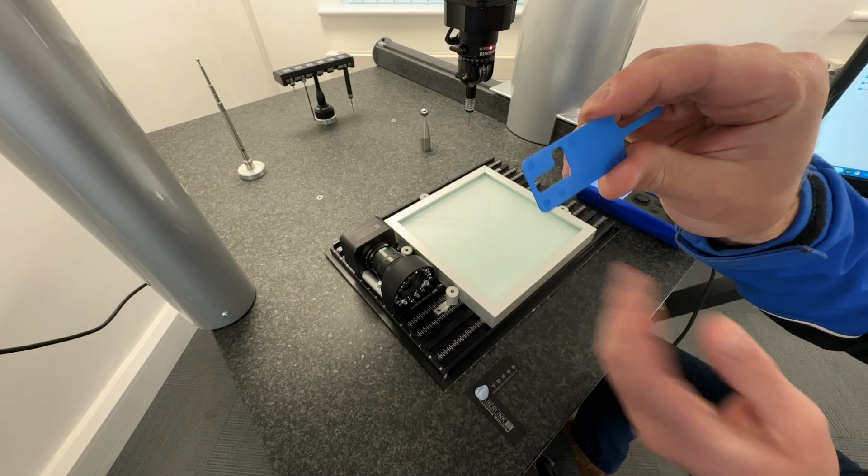In this example we'll be measuring this encoder spacer. It's only 0.8 millimeters thick and it's soft plastic, flexible, very difficult to measure with the touch probe. It also has some very small radius, so it's a perfect example of when you would use the camera.

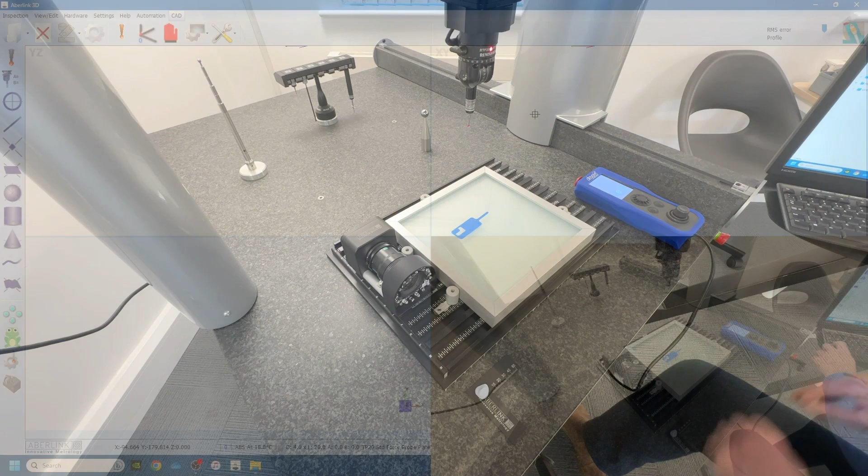So let's dive in, this will be example number 1. Firstly, let's switch over to the camera. Probe options, camera, manually change. We will remove the probe head, connect the camera, set the probe head somewhere safe, and then OK.

The camera now switches on and we should be able to see the software there.

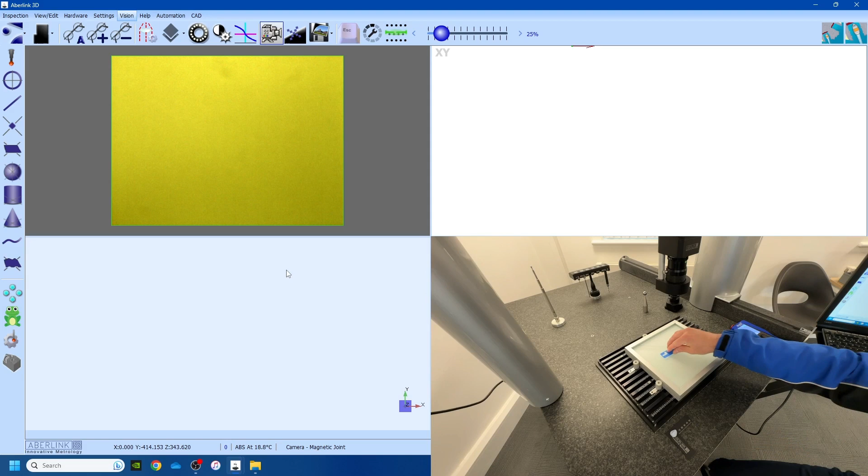The first thing we want to do is try and fixture up the part. If we want this to be a repeatable program, we need to be able to set this in the same place each time. So we fix that somehow by using the fixture plate and keeping the reflective plate located in a set position via these 4 spigots. So now all we need is a way to locate this via a fixture and then remove the fixture so we can scan the edge.

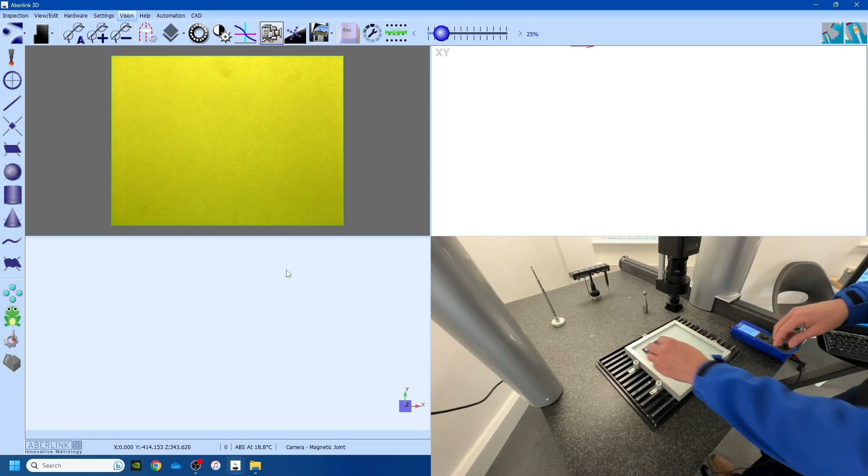Very simple design, this is just one of the Aberlink fixture plates, and if we set this in the corner, we can locate the part into that corner and then remove it. That will keep that in the same place every time.

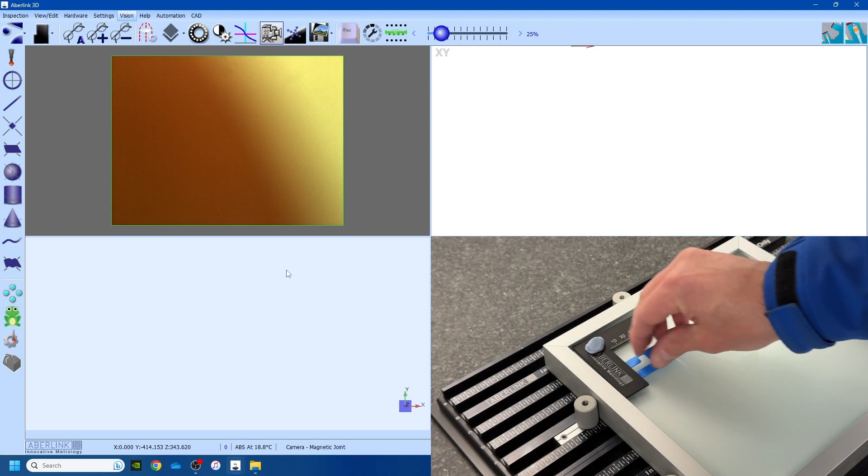So just to show you that once more, if the part is floating free, set something in the corner that we can repeat. We slide the part into that corner and then we lift that out of the way. That will repeat every time.

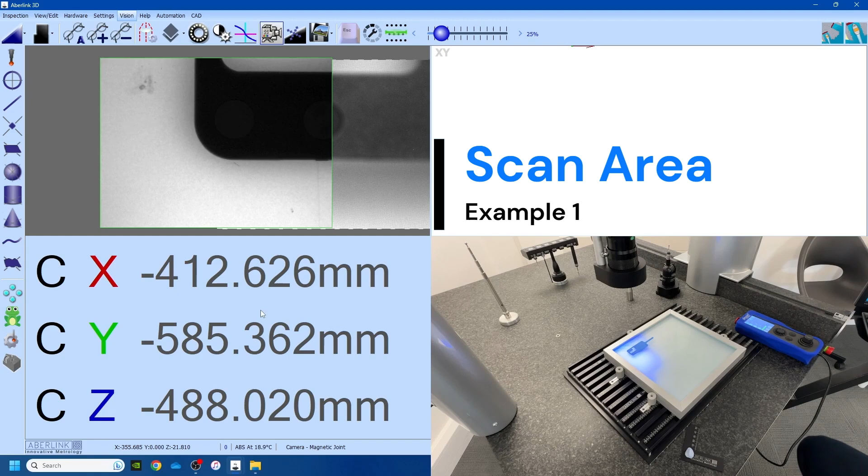The first thing you'll notice is the part does not fit within the field of view for the camera. So what we need to do is set a scan area to pick up on the entire part. This lets us see the entire part on the screen in one go.

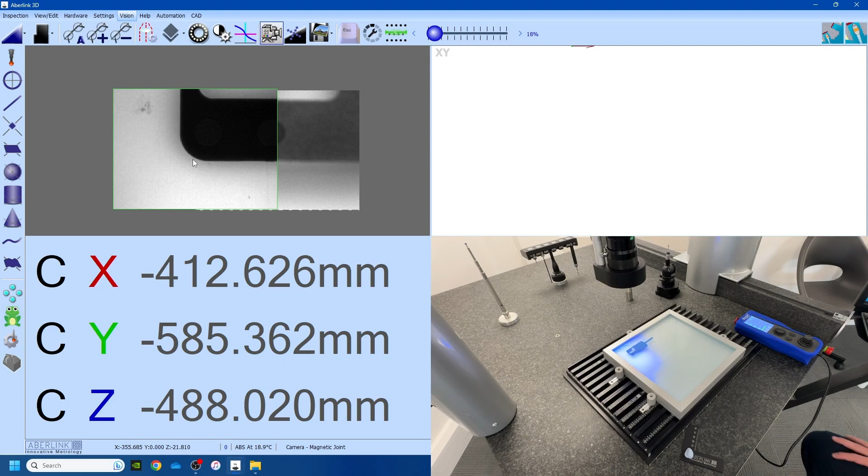We can then pick off measurements and the camera can execute them. It's very difficult to do this without seeing the entire part on the screen, and that is why we will use the scan area function here.

Now sometimes, to not waste a lot of time scanning a huge area, what I like to do is go to the bottom left hand corner of the part, which we are now, then also drive over to the top right corner, so that would be something like this, and wait.

The idea is if we roll out, we can see the box we need to set for the scan area. So now we will click scan area and we'll left click down here and then click here. So that's 2 left clicks to define the scan area.

The camera then breaks that up into small sections, and you'll see now the camera stepping along and grabbing the image of each section, and it saves that image to the screen so we can see the entire component in one go, making the measurements a lot easier and a lot more precise.

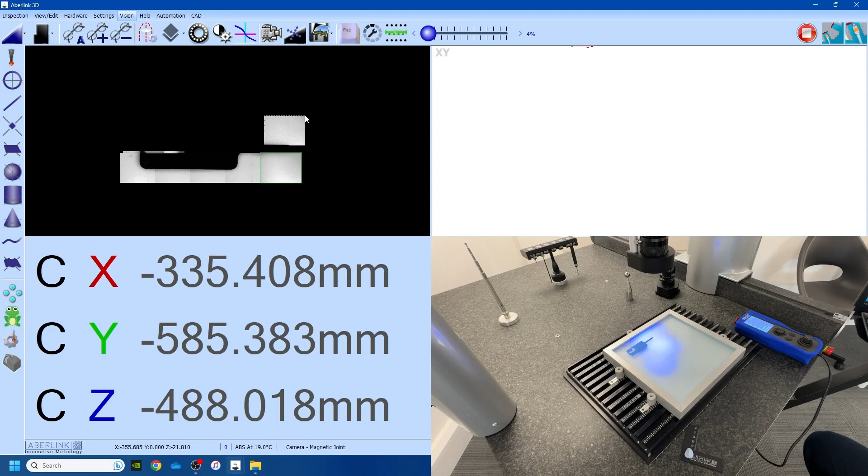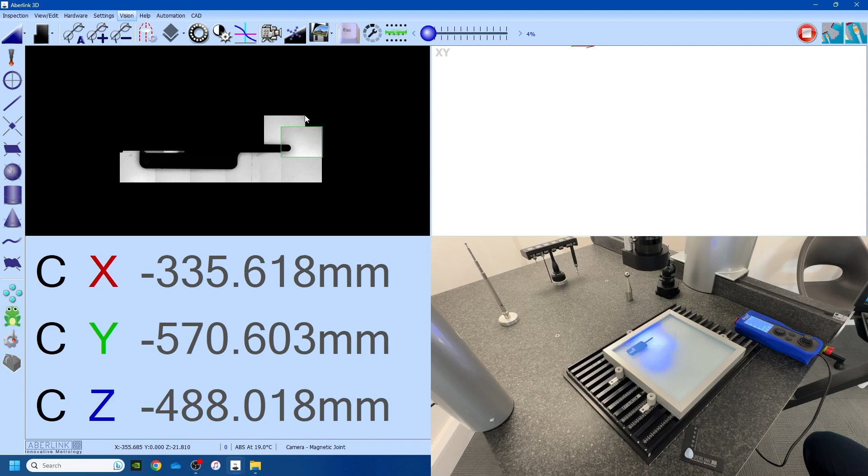So we let this just scan through this scan area section by section, and while this is scanning, it's worth having a think about how you will reference the component.

So you still need to define the degrees of freedom. The only difference with the vision system is it's 2D, so we don't need a plane - there is no plane measurement in the vision system. So we need an origin. This is a circle or a point, and then a line to do the rotational alignment.

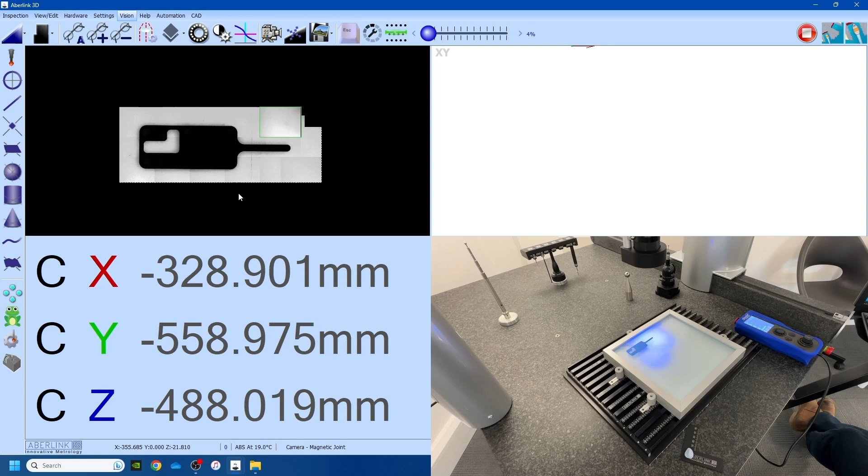In this example, we will use a line and point. The point will be constructed at the corner intersection, and we'll use the top left hand corner. So it will be a line along the top, a line along the side. First line will be a reference, and then we'll construct a point to create the origin in the top left hand corner. So that scan window is complete now.

We can now look to get some measurements done. So firstly, we need to decide on the measurement method.

This part is always going to be edge detection. It's very simple, there's no other options on this. We can either decide to use the individual features or auto select feature - it's personal preference, completely up to you. The only things that won't work are one click feature and all edge points, because these only work for a single field of view, and this is multiple fields of view in the scan area, so these features will not work.

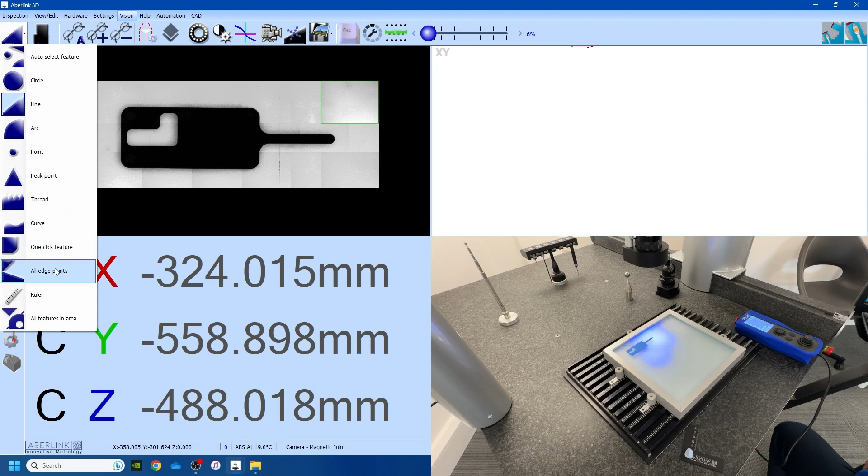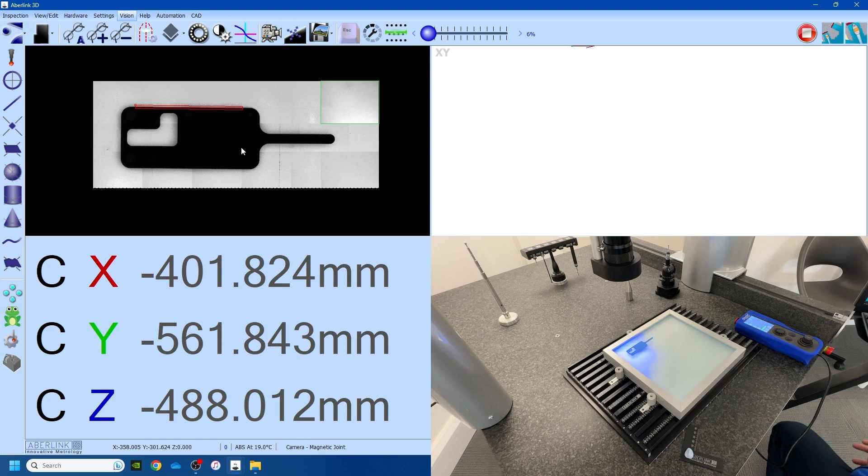So let's try auto select feature, and we want to get this line measured first. So line, scanning edge, that goes and executes the command, and it will step along as it goes, picking up on the entire scan, and this is going to be a reference.

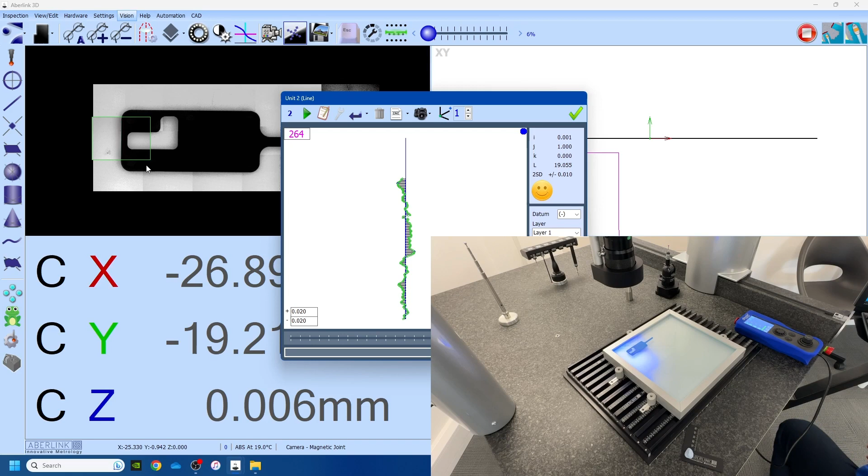We then need another line, so 1, 2, line, camera goes and executes the command, scanning the edge. Now the rule system does not allow 2 lines as a reference, so we need to hit the green tick and then construct a point. So point, construct, where the 2 lines meet, and set this as our origin - XYZ 0, with the rotation being done by the top line. That is now the reference system complete.

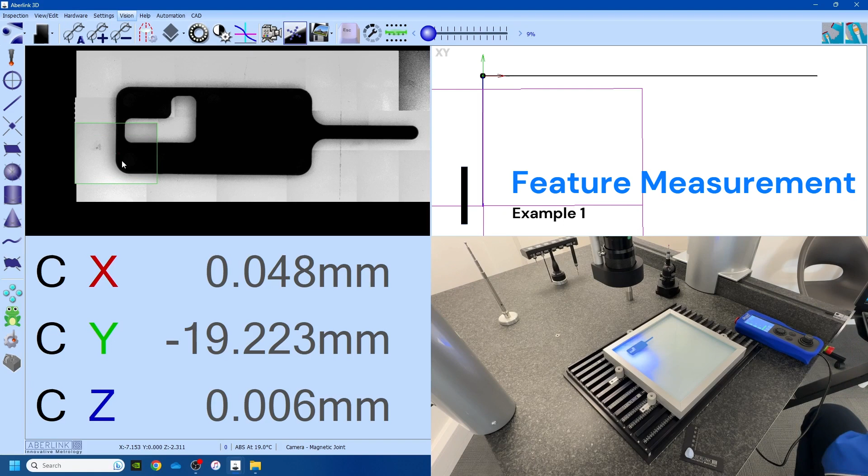We can now look to continue measuring the remaining features and then dimensioning them. So let's go through and pick up the next feature, which will be this radius. So 1, 2, 3, scanning window, green tick, line, 1, 2, 3. It has to move to pick up the remaining edges of the line.

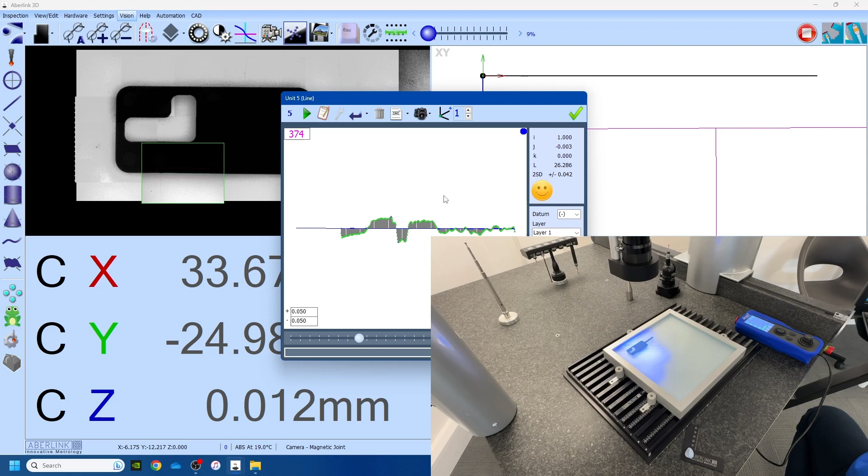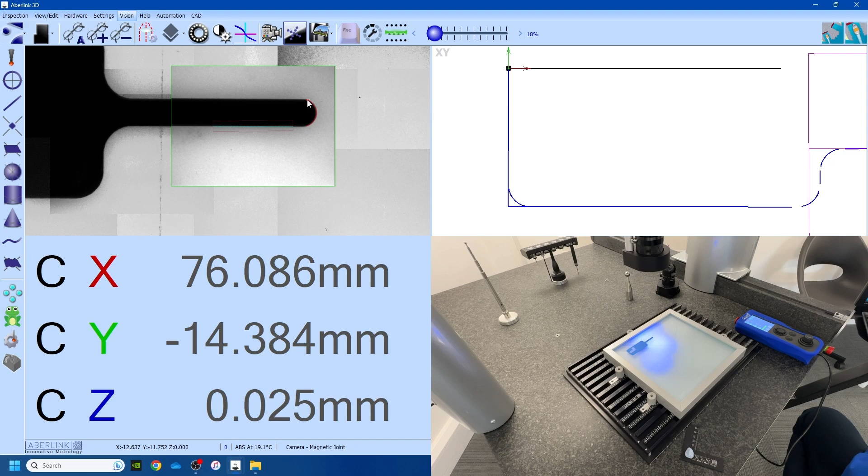And then green tick, just redraw that. Radius, 1, 2, 3, green tick, line, 1, 2, green tick, radius, 1, 2, 3, moves to execute the command, green tick, line, 1, 2, 3, moves to measure the remaining feature, green tick. This is a solid radius, so we go 1, 2, 3, there we go, green tick, line, 1, 2, green tick once it's complete, which it is now.

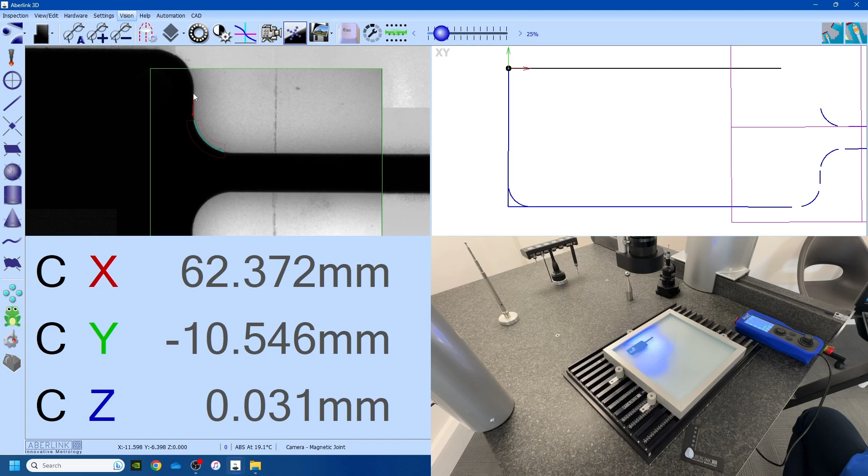Radius, 1, 2, 3, line, 1, 2, radius, 1, 2, 3, green tick, and then to finish off the outside profile, 1, 2, 3, moves to execute the command, and that is the outside profile complete.

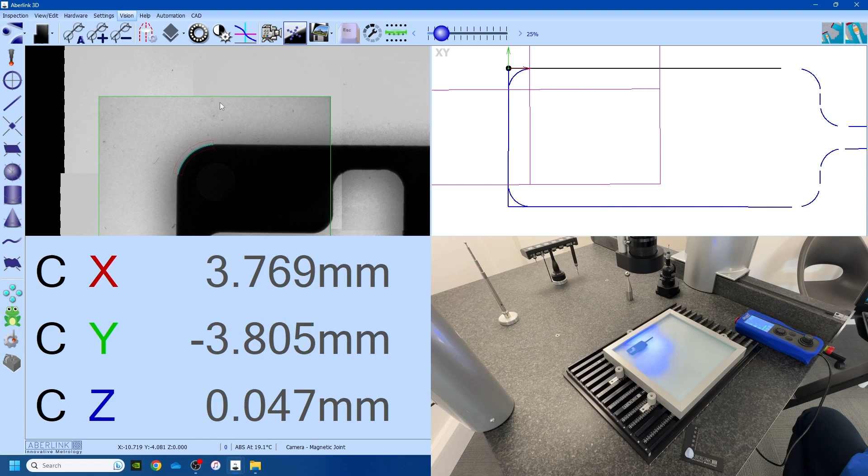To finish off, we will go in and measure the inside profile. So 1, 2, scan, 1, 2, 3, scan, 1, 2, 1, oh, clicked a bit too early there, 3, scan, 1, 2, scan, 1, 2, 3, scan.

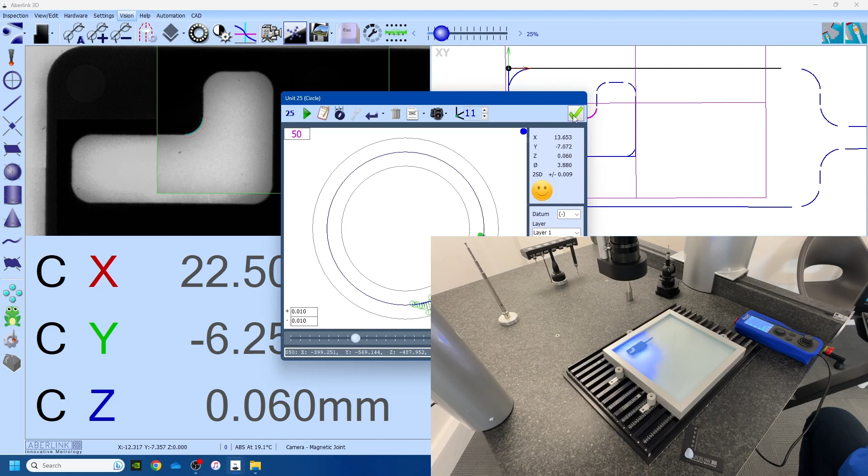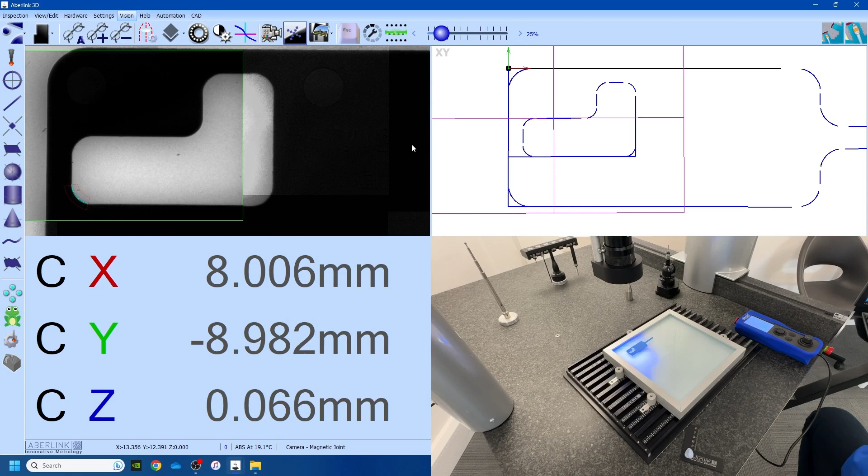1, 2, scan, 1, 2, 3, and scan, 1, 2, scan, 1, 2, 3, scan, 1, 2, scan, 1, 2, 3, scan. And that is now the full component measured.

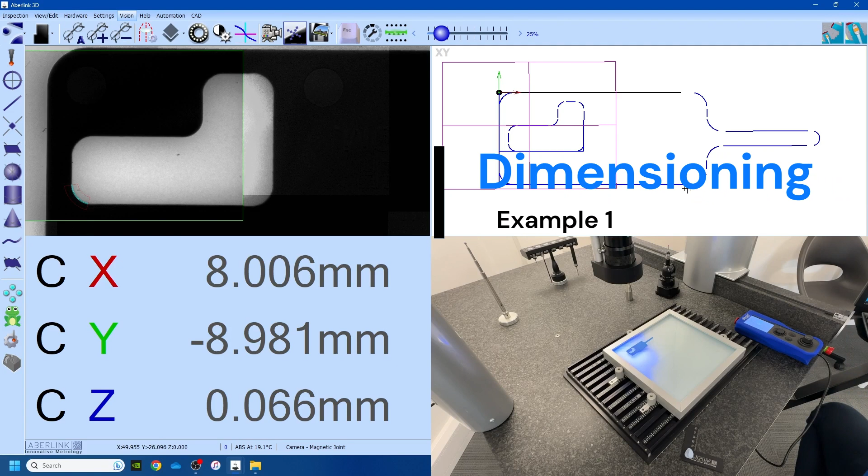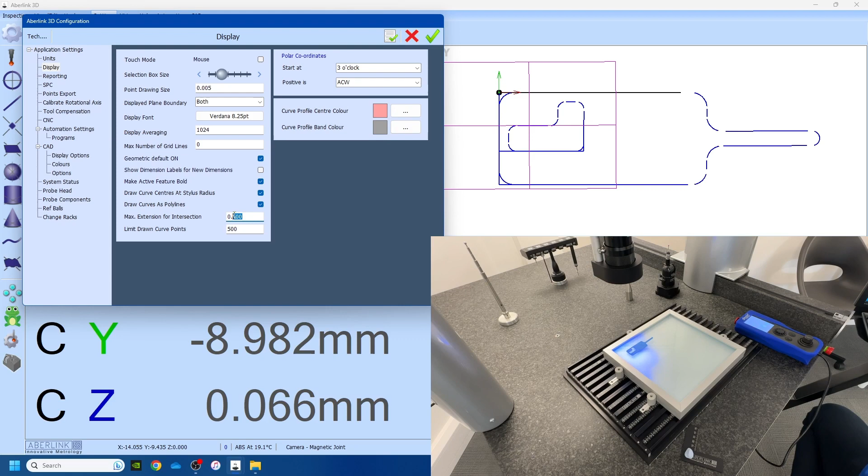We can now dimension and then run the program back. So now we can look to dimension. You might notice the camera lines stretching further than you measured them. Just while we're on the topic, this can be addressed in settings and display, and max extension for intersection 0.5.

So this is if any lines are within 0.5 millimeters of each other, the line will automatically extend. You can try 0.1 and apply. When you remeasure it or rerun it, you'll notice it doesn't tend to extend as much. So you can sometimes have this issue. It doesn't actually affect the measurement of the feature, but just be wary if you need to display it a little bit better on the screen. That's how you do it.

So now we can get some measurements. So let's just get the width - we'll call this width. I don't have an engineering drawing, so this is just for an example. We've then got the length, we'll extend that to maximum.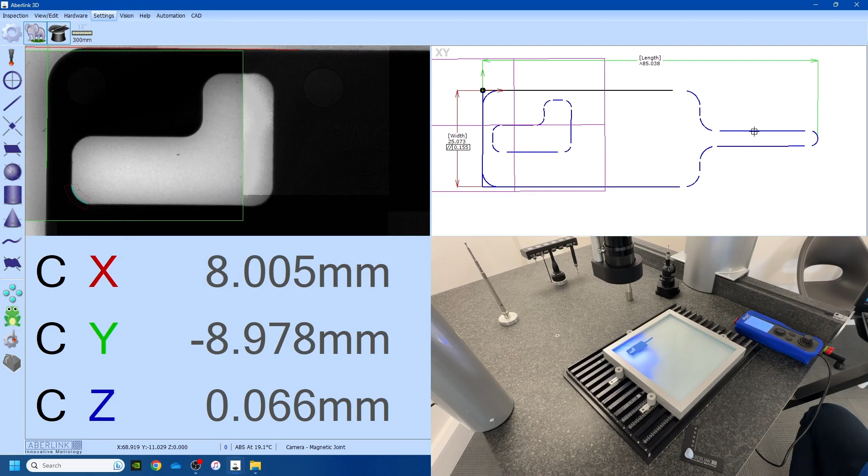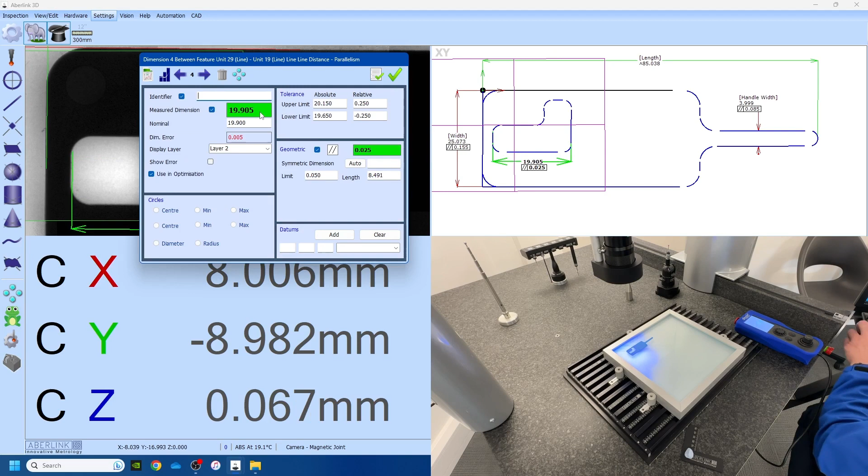Handle width. There we go. Internal pocket. Length 1. And you get the idea.

Again, as I've mentioned, measuring a small radius like this, a little 2mm radius, even these internal radius would just be very difficult to measure, especially given the width of the part, so the camera picks up on them no problem. And now we have the dimensions complete, we can look to run the program.

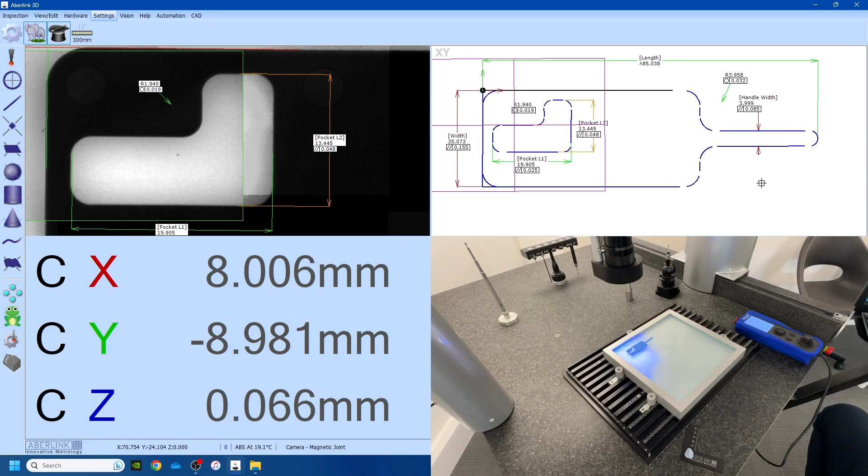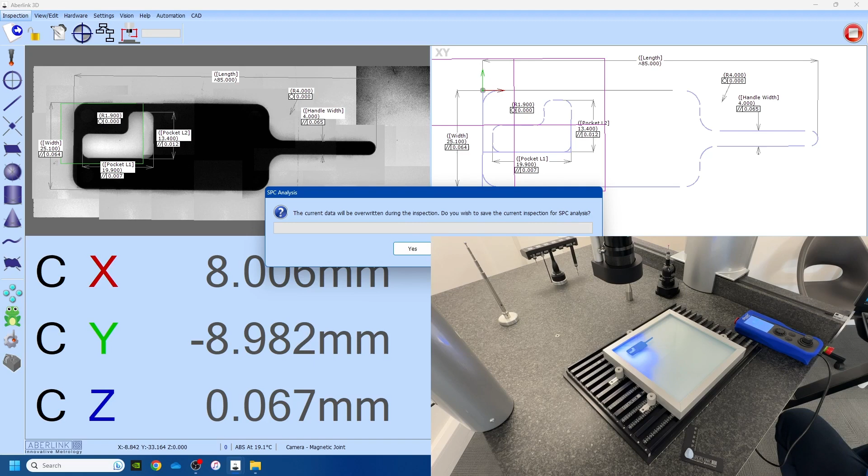So this is now a fully functional program, so we can press inspection and play. Do you want to save it for SPC analysis? We'll say no. And you'll see, if I turn the throttle up on the machine, the software is now executing the measurement routines.

So this will cycle through. Again, just like any touch probe measurements, as the features are measured, the dimensions will show the actual size and a pass-fail limit. Anything that's failed will go red, anything that's passed will go green, and anything within your warning limit will go orange.

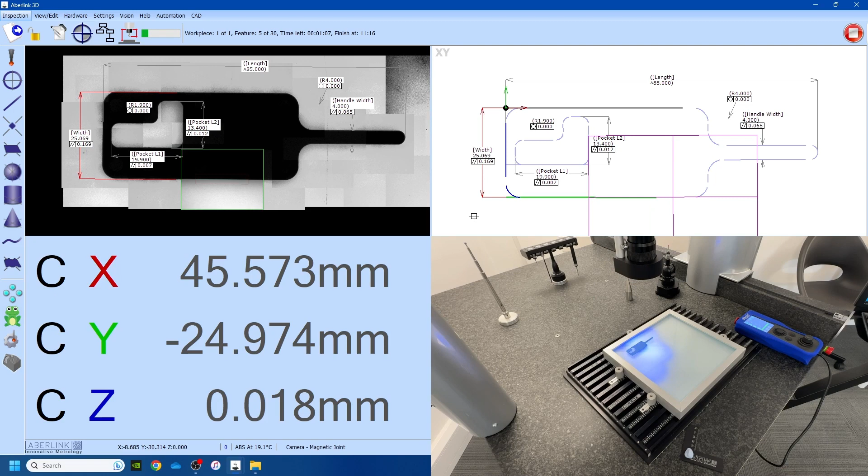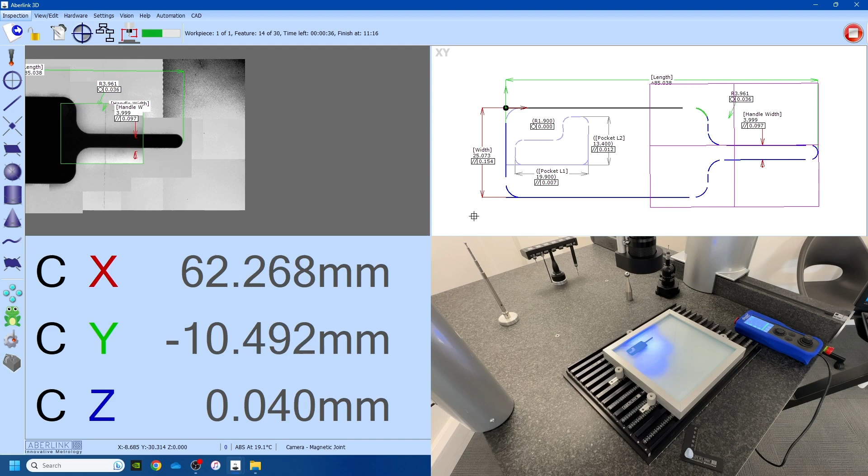I'll let this complete. You can see the measurement routine, once the program is created, is a lot faster than building the program. This is no different to using a touch probe with contact measurement. A few more measurements to go. You'll notice it picks up on measurements within the field of view a lot faster than when it has to move and stabilize.

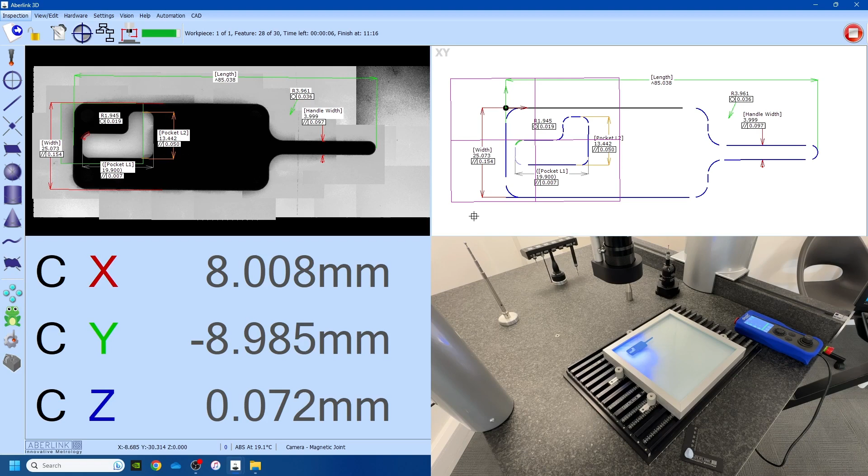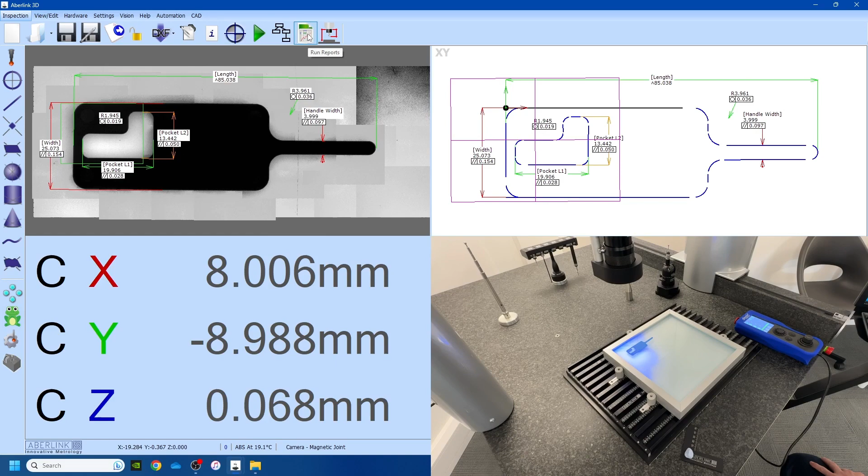Almost complete, and that is the program ran. It functions exactly like anything else. We can get a report just like we can in the contact measurement mode. So run reports, and you select your options in here: tabulated dimensions, generate report here, and that works exactly the same as the standard software.

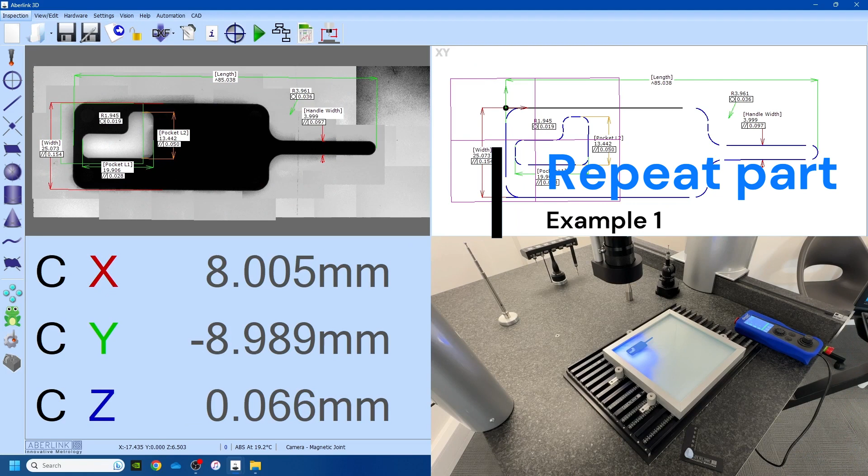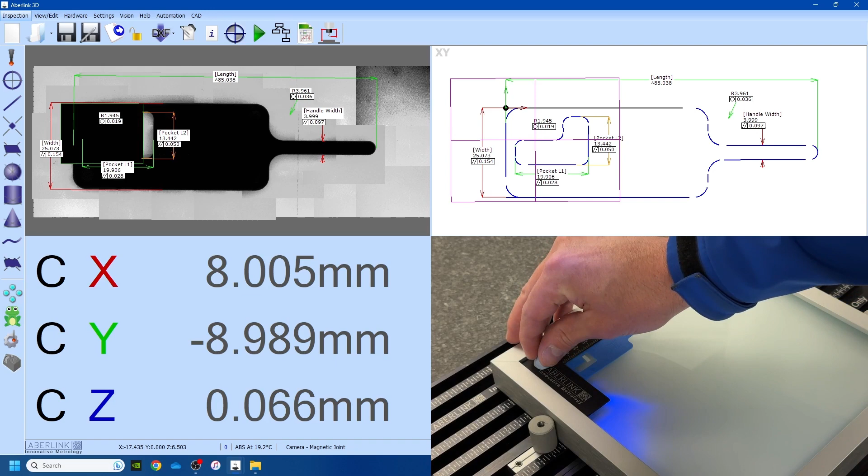Just to highlight the idea of the fixturing, if I zoom in on the fixture plate now, you should hopefully be able to see, if I have a batch of a few of these, I can quite easily, if it wasn't so flat, remove one. Say I've got a batch of them, I can easily set the fixture plate up. So I've removed this one, slide this one into the corner, lift this one out of the way, and if we press play now...

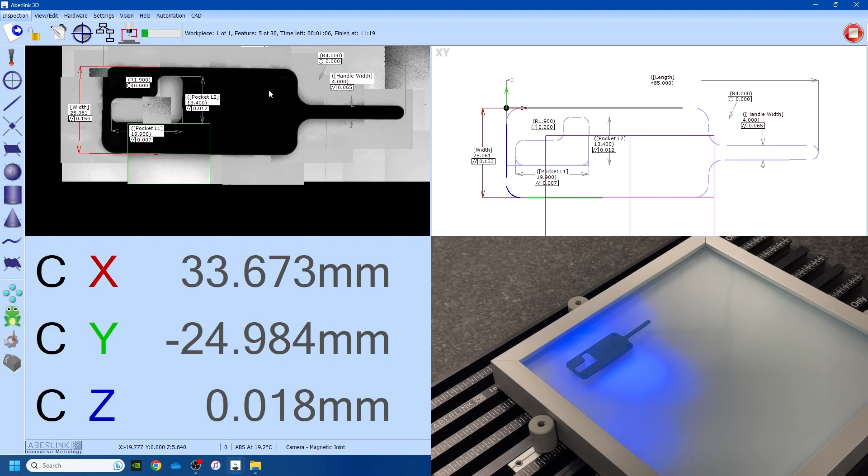The camera goes looking for the edge, and once it has the reference system, exactly like a touch probe, if it can find the reference system okay, it can skew the remaining measurements via the origin and rotation. It executes exactly the same. There we go, and it continues to measure just as it normally would without any issues. So this is just proving out the fixture idea and how to make repeatable programs for batch work.

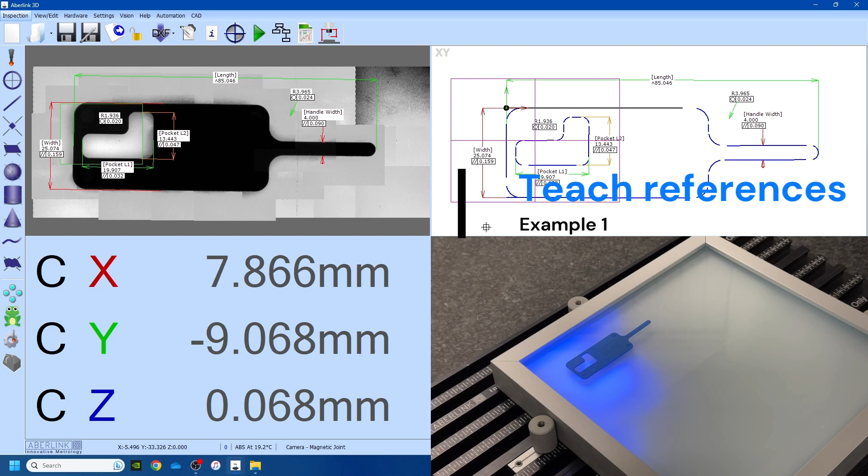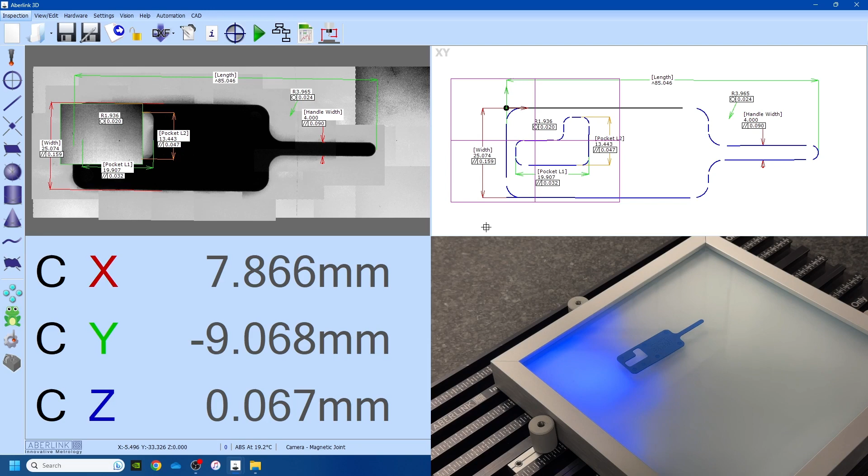So finally, the last thing we're going to cover is if the part completely moves or you have to reteach the position. This could be because you don't have fixturing, so every single job is moved, or the fixture plate entirely, or backlit plate, could also have moved. You run a batch of 10 with this setup, but then a year later you get another batch and it's not going to be in the exact same place.

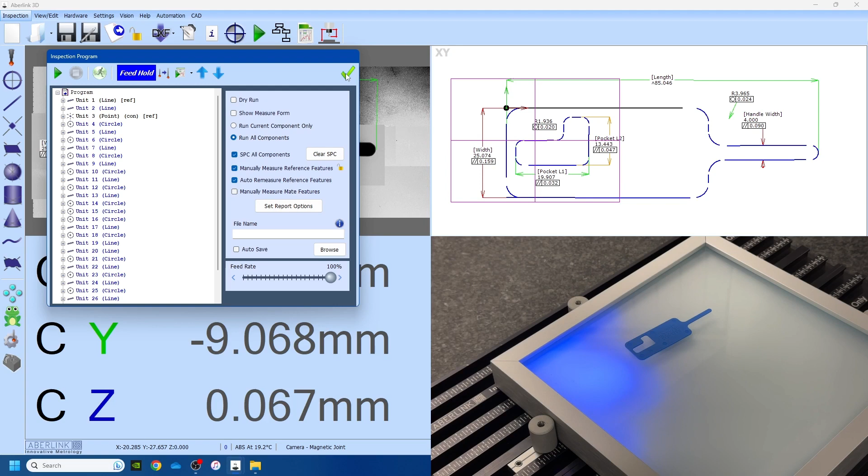So you don't have to completely redo the program, the part's moved. All we need to do is manually teach the reference features. So with this, we'll go into program details, this little flowchart icon here, and we will say manually measure and auto remeasure reference features. Hit the green tick and press play, and this is going to wait for us to manually measure the features.

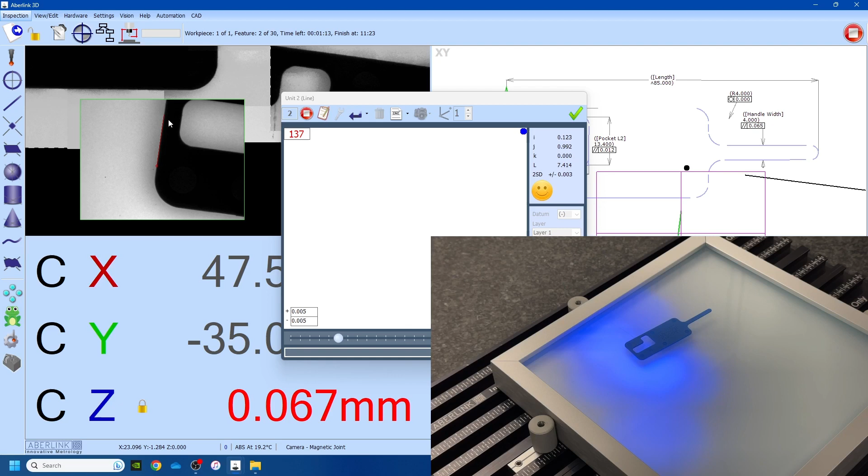So again, we will move over to the part, and the joy of this is it doesn't even have to be perfect. We just go 1, 2, and scan. One, 2, and scan. Hit the green tick. We then go on to line number 2, so 1, 2, scan. One, 2, scan. There we go, that's scanned it enough, so we can move the camera away, press OK.

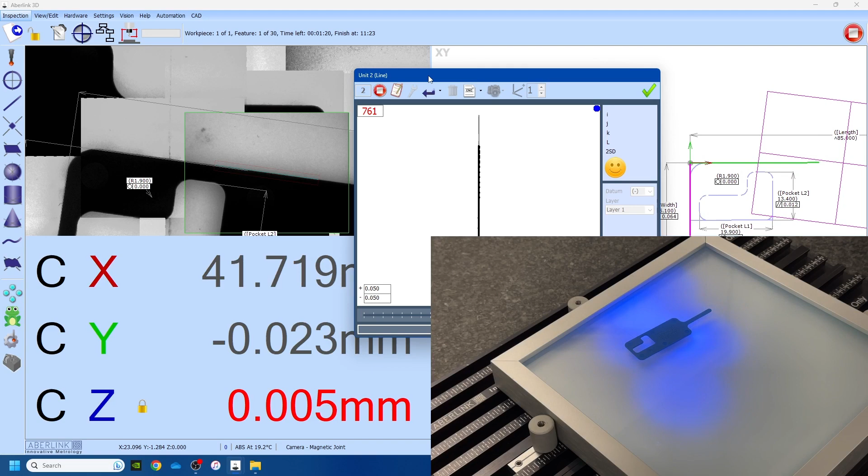And you'll see it now goes and executes the measurements just like it did in the previous routine. Even though the part's moved and rotated, the camera can find the remaining features okay and give you a complete measurement program just like before.

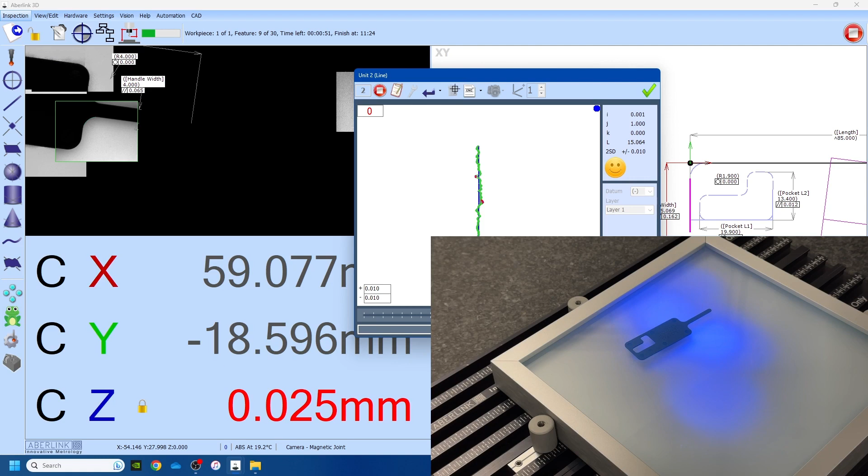So manually teaching the references is exactly the same as the touch probe. You manually measure them. With bigger scans like the one I just did, sometimes if you've gathered the data you think you have, you can just press the green tick and the software will automatically move on to the next feature if it doesn't do it itself. But other than that, the reference system should pick up the same, and you'll notice in the standard XY window, if we redraw that, it's the exact same program.

So that is how you manually teach a part and rerun it. I'll stop this here now because you get the idea, and that is how you manually move a part.